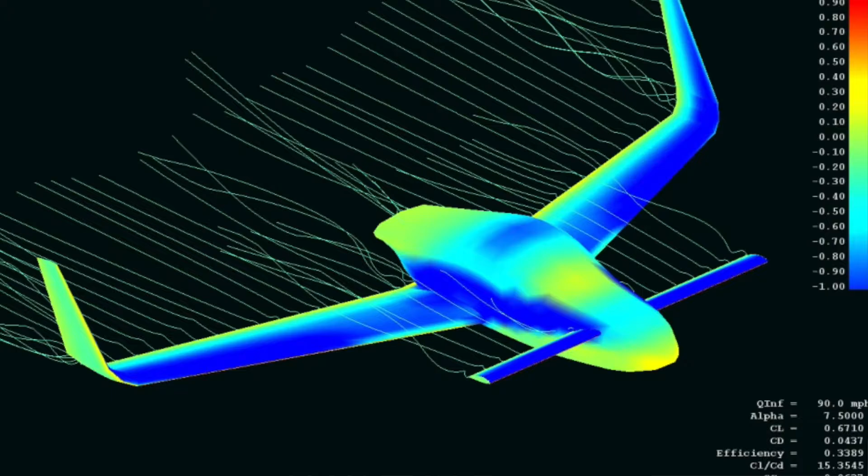We had to determine whether or not a program made by an MIT professor called X-Flyer 5 was a viable resource for the lab and for other technicians in the aerospace field to use to accurately characterize different airfoil characteristics that you would typically have to test in a wind tunnel.

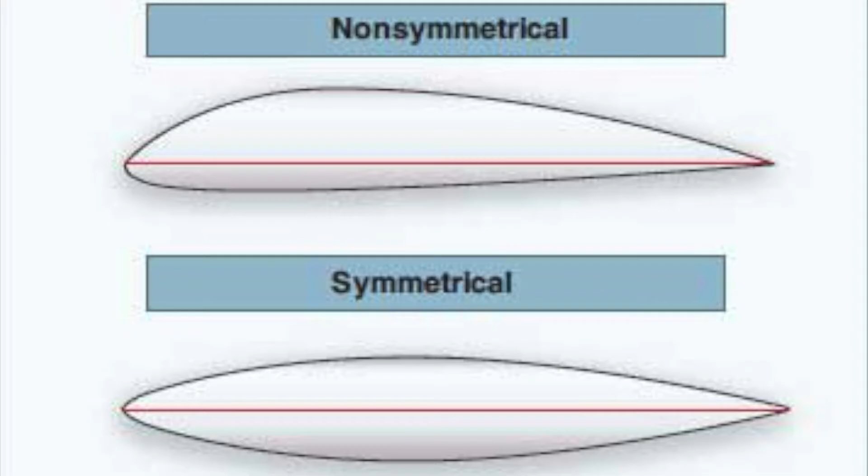So the airfoil that the professor chose was a NACA 0010 airfoil. It was a symmetrical airfoil, meaning the top and the bottom were exactly the same. The aerodynamic characteristics would be more consistent from top to bottom, whereas an asymmetrical one would either create more drag or lift within the airfoil.

A great example of this is a spoiler. If you notice, most spoilers aren't very symmetrical, and that's for a reason. They usually have some type of tail at the end to create more drag, because drag is needed for a lot of high horsepower applications, so you want the rear end planted down as you're delivering all the power through the drive shaft into the differential into the rear axle.

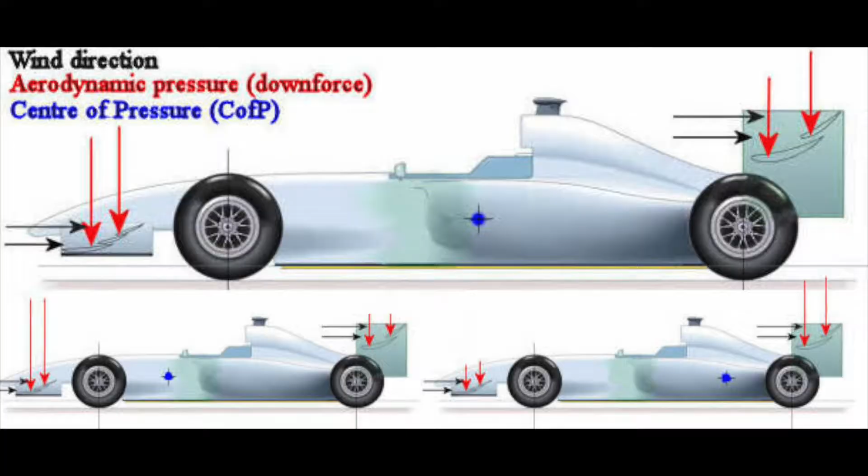So in this case, we wanted to test the NACA 0010, being a symmetrical airfoil, comparing results from actual wind tunnel testing to the program XFLR5.

The program XFLR5 is pretty cool. It has a directory of different airfoils, ranging from asymmetrical to symmetrical. Regardless, you're able to get your coefficient of drag to coefficient of lift charts, which is exactly what most engineers use to determine whether an airfoil could be used for their application.

Going into this, the professor asked us if we wanted to use Excel or MATLAB, because we were going to be going through a vast majority of different values from both the wind tunnel testing and the program. I've known Excel since I could remember, but I wanted to challenge myself, and I knew MATLAB was something I'd been wanting to learn since it's used tremendously in the engineering industry - automotive, aerospace, you name it. It's a great tool for data analysis and data manipulation.

I decided to do the same thing I did at UCLA with SolidWorks and do it with MATLAB. So if you can guess, in a week I read an entire Introduction to MATLAB book, which is right here - it's called MATLAB for Engineers. I did all the exercises, created my own programs, the programs that were in the book, until I felt comfortable with it.

So over the past century, applied aerodynamics has been used to characterize whether or not MAVs, or micro air vehicles, can be used in low Reynolds numbers, primarily Reynolds numbers lower than 200,000.

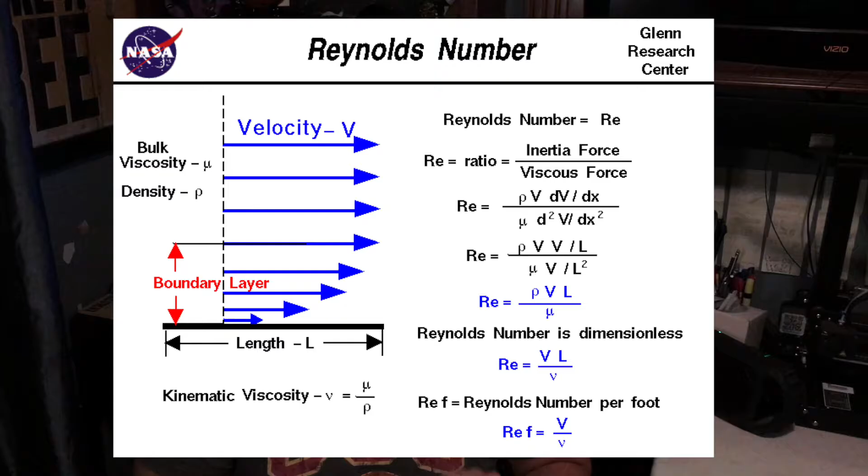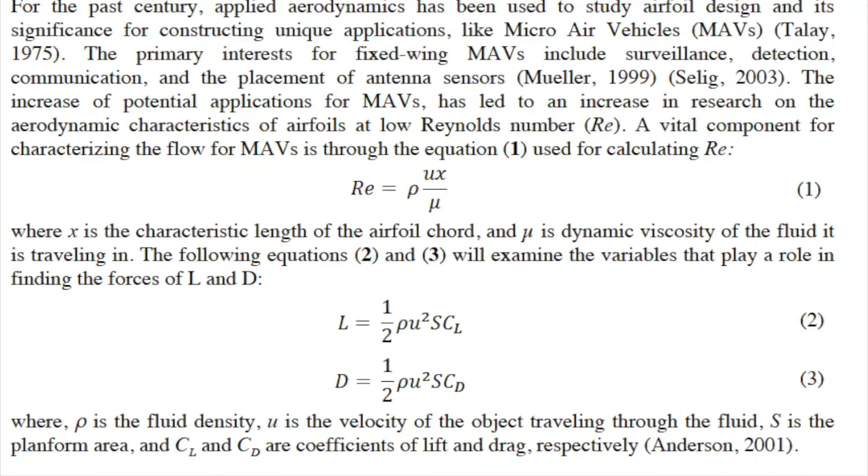Now, Reynolds number is just a ratio between inertial forces and viscous forces. A general equation for this would be Reynolds number equals rho times ux over mu, where x is the characteristic length of the airfoil chord, mu is the dynamic viscosity of the fluid it's traveling in, rho is the density of the fluid, and u is the velocity the vehicle is traveling at.

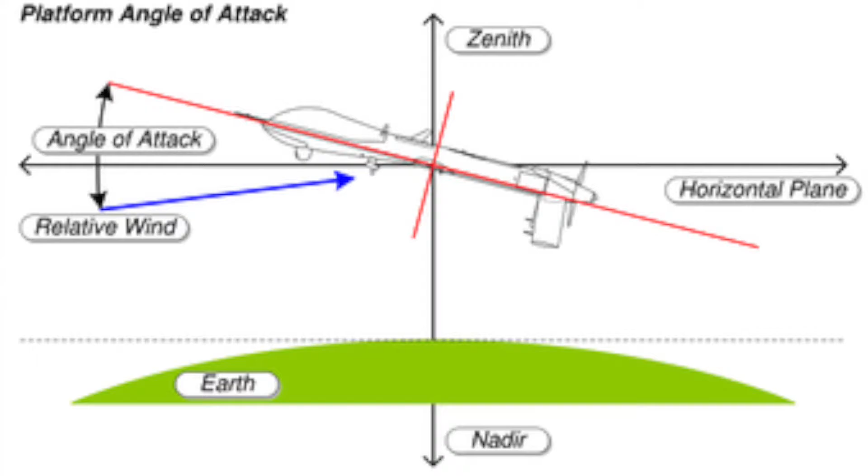From these Reynolds numbers, you're able to determine the lift and drag of an object. You put a to-scale model into a wind tunnel and measure its different aerodynamic characteristics depending on the angle of attack - the angle in which the vehicle is in relation to a horizontal surface.

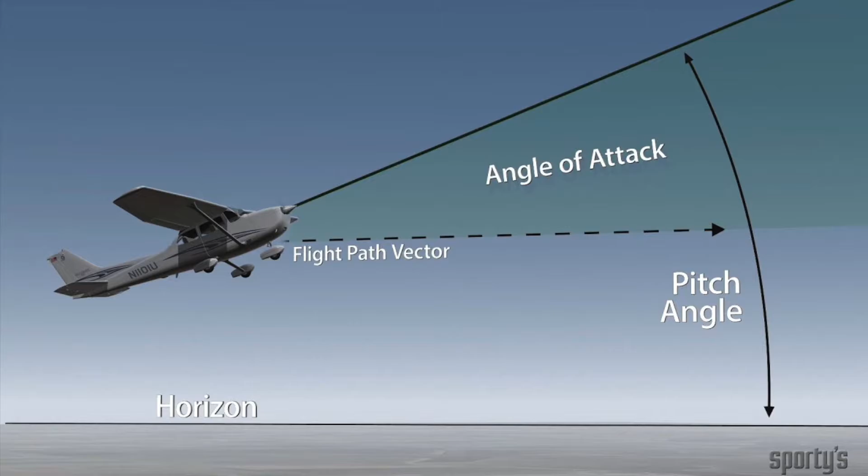If you've ever seen a plane take off from an airport, you notice it goes through the runway and immediately starts pointing its nose up, therefore creating an angle of attack. This angle of attack ends up creating a high pressure zone under the vehicle and a low pressure zone over the vehicle, creating the phenomenon of lift.

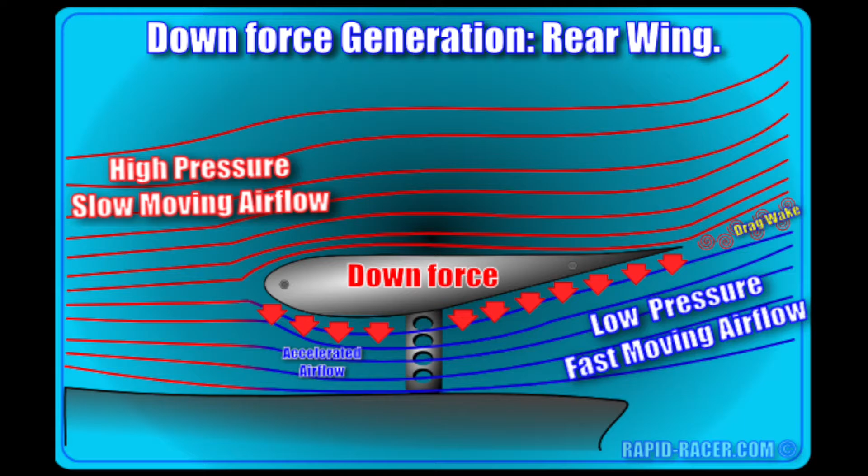And vice versa with cars, like I mentioned earlier with spoilers - if you have a higher pressure gradient on top versus the bottom, then you're going to create downforce, and that's what you want for your rear end to stay planted to the car.

Now, it's very important to keep angle of attack into consideration when creating vehicles, because each vehicle has what's called a stall angle.

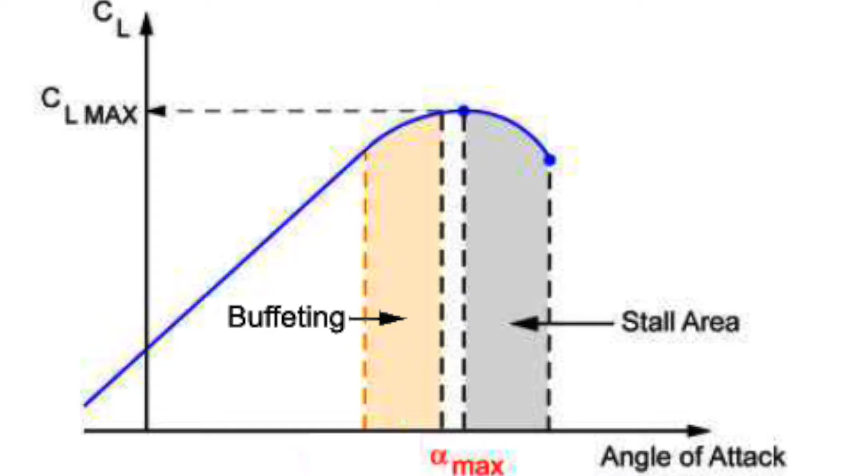If the vehicle reaches the stall angle, it loses all aerodynamic characteristics and is no longer able to be controlled. Over the past century, we have countless research papers and theories on what happens with Reynolds numbers that are high enough for larger vehicles.

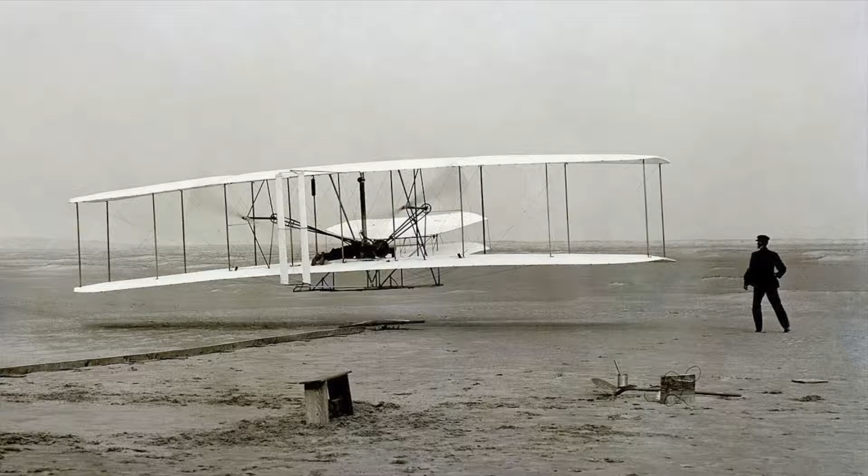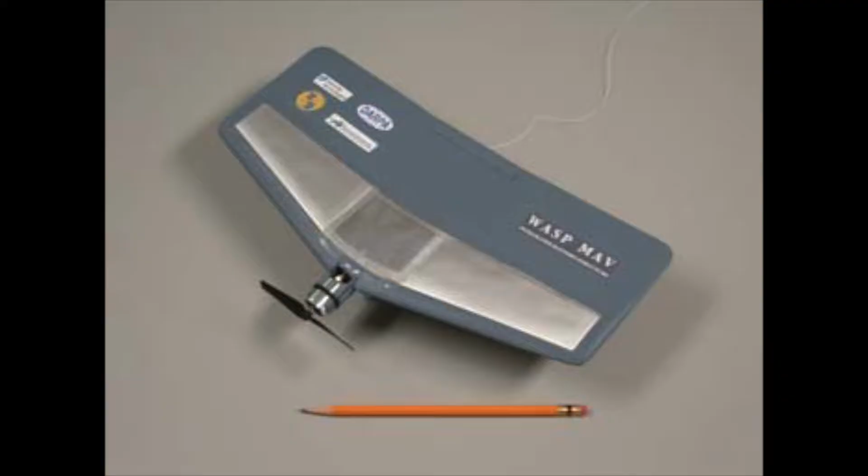When the Wright brothers began testing their vehicles, it was for a fairly large vehicle. Now in modern times, we're moving more towards drones and smaller vehicles, for their stealth, maneuverability, and compact sizing. Unfortunately, the research hasn't caught up, and for Reynolds numbers lower than 200,000, there's no real way of testing it theoretically without putting it inside a wind tunnel.

So our main objective was to see if XFLR5, the program I mentioned earlier, was able to accurately predict these aerodynamic characteristics for Reynolds numbers lower than 200,000.

Our approach was to have our NACA 0010 airfoil within the wind tunnel and change its angle of attack from -4 degrees upwards to 13 degrees, and also change the Reynolds number ranging from 40,000 up to 180,000. This was a good range - we could have gone lower, but we wanted to stay on the safe side to make sure we didn't get any turbulent flow.

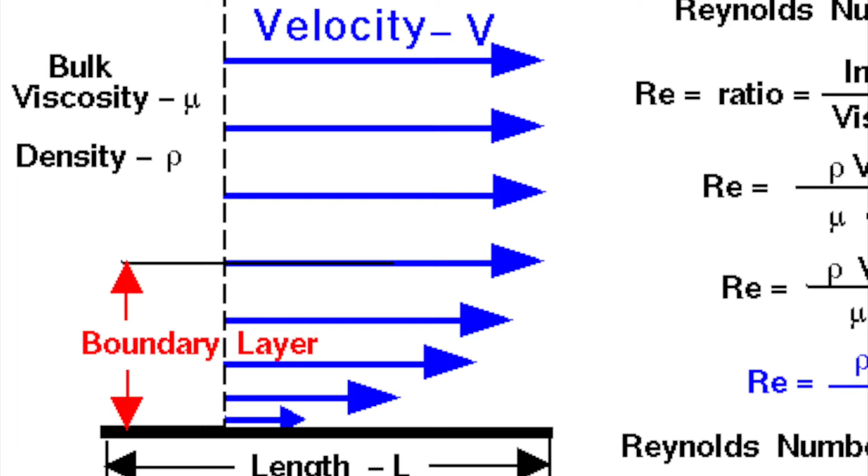Turbulent flow is the unsteady flow of a fluid. If you've ever seen a stream with very straight lines going through it, that means the flow is laminar. Now if you see the edges of the stream getting stuck to the walls, that's because the viscous forces are greater than the inertial forces. The inertial forces create the steady stream. As you get further away from the walls, the boundary layer is reduced and it becomes less turbulent.

You might have been on an airplane and heard the overhead announcement saying we're going to be reaching some turbulence, make sure to buckle up. Turbulent flow is fluid motion characterized by chaotic changes in pressure and flow velocity - it's all messed up, going all over the place, and unpredictable, with a lot of spontaneity. Laminar flow, on the other hand, follows a parallel line, is continuous, and has characteristics that can easily be recorded. We wanted to make sure we had that within the wind tunnel.

As we began our testing, we had to make a program using LabVIEW to record the values using the pitot tube. Within the wind tunnel, we had two pitot tubes - an upstream pitot tube and a downstream pitot tube. This allowed us to get an accurate, consistent reading of the velocity of the wind tunnel upstream before it hit any interruptions like the airfoil, and we also had one behind it.

The upstream pitot tube was stationary - it just gave us a basic value and made sure we had the correct wind velocity we wanted to test for the airfoil. The downstream pitot tube was the one actually sweeping through each layer behind the airfoil after it disrupted the flow of air.

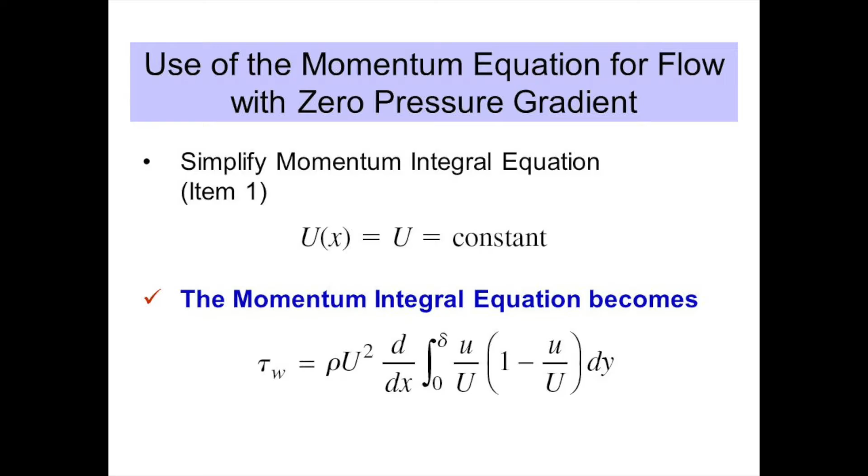When gathering all this information from LabVIEW, I had to change these Excel files and import them into MATLAB. Within MATLAB, I was able to manipulate the values to get the correct order of things I wanted - specifically, how the boundary layer was affecting the wake deficit of the airfoil.

I also wanted to see how the chart was starting to look with different angles of attack and different Reynolds numbers. From the beginning of the internship, we already ran XFLR5 and knew exactly what the program was spitting out, so we had an idea of what the chart was supposed to look like.

As I started putting the different coefficient of drag over coefficient of lift values versus angle of attack, I started to see the trend occur. However, the trend was either off because of our testing, or the XFLR5 program was off because of the way it was programmed. So after getting 1,000 lines of code done and manually adjusting all the boundary layer errors we found, we finally got a graph that looks something like this.

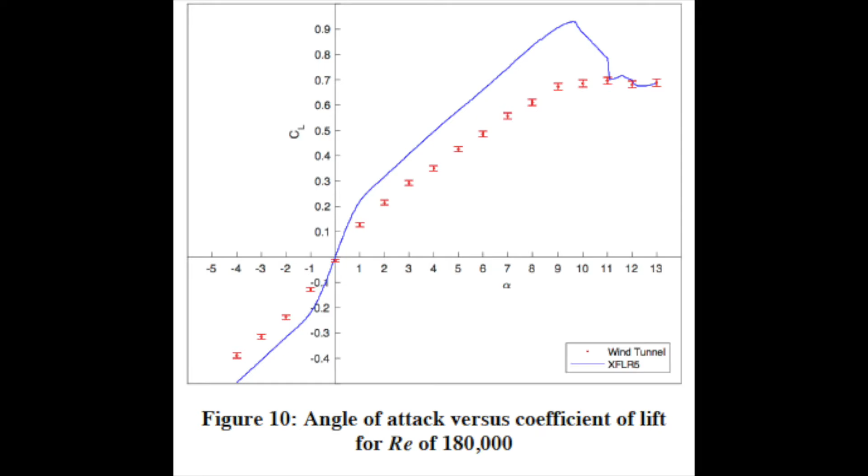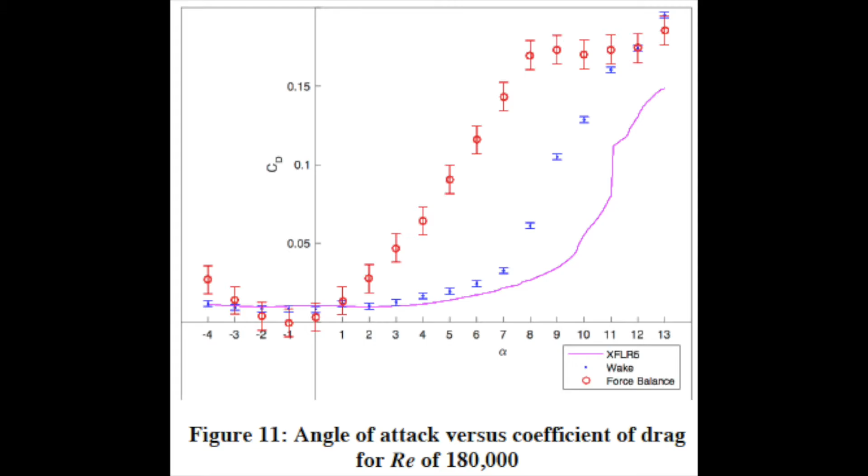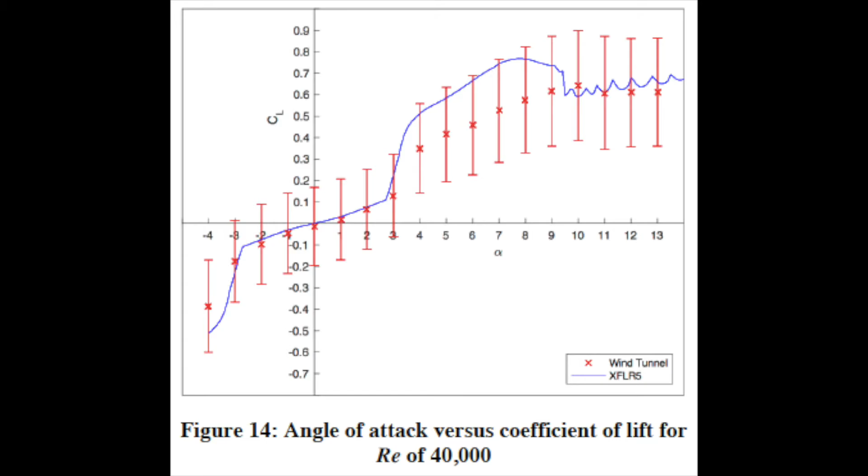We move over to 180,000 Reynolds number, and we see the characteristics also match. When we move to 40,000 Reynolds numbers, we also see the characteristics match, but we have these huge error bars. These error bars are here because of the amount of turbulence that we found within the system.

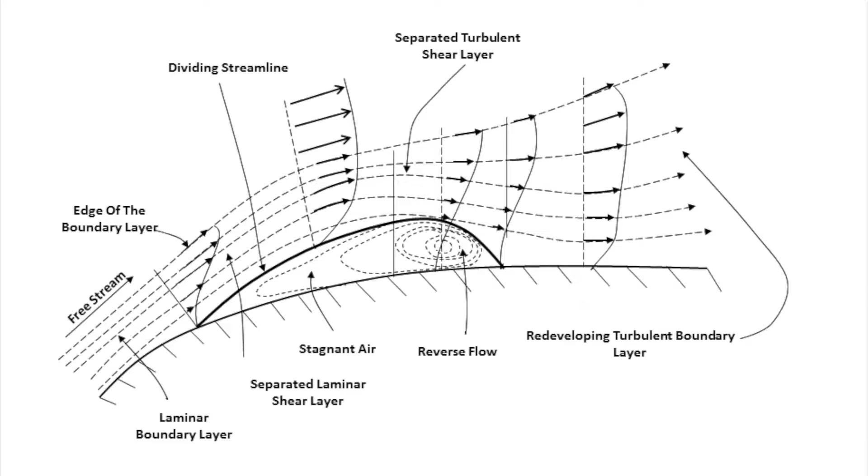Since we were dealing with laminar flow, we were noticing a phenomenon called laminar separation bubbles. As fluid is moving through the airfoil, it wants to stick, it wants to stay onto the airfoil. However, as you change the angle of attack, it gets harder and harder for the fluid to actually stick to the object. So what you end up getting is a bit of turbulence behind the airfoil as you increase the angle of attack, better known as vortices, and those vortices end up creating a bubble.

Since the flow is still laminar, there are some occasions where the flow actually reattaches to the airfoil and disrupts the force balance we had inside the wind tunnel. After realizing this phenomenon was occurring, a small correction factor was implemented into the code I had written, and just like that, we had correct values. The correction factor I used was 0.75.

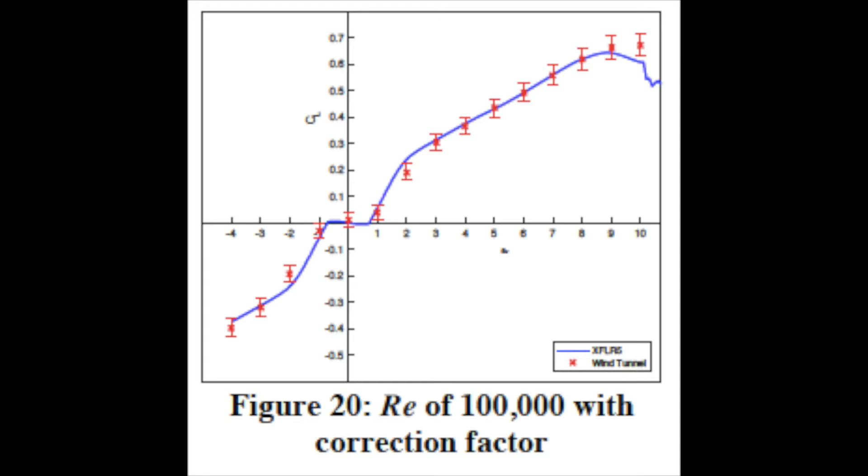By implementing this correction factor to all the data, this is what happened. We ended up getting accurate values. If you look at these charts from before and after the correction factor, the results are incredible. As you can see, as we match up the coefficient of lift versus angle of attack, the values on the graph are very similar. We did involve a couple errors that might be coming from the tolerance of the force balance, from the pitot tube, and also the compressibility of the air.

So why is this important? It's important because engineers in the aerospace industry can now use this program when developing micro air vehicles. This is very important, especially for companies like Amazon that are trying to implement one-day shipping by drones. You have to have these drones able to withstand the realistic aerodynamic characteristics involved in creating a smaller, more compact vehicle. This can also carry over to smaller surveillance drones, to military applications, you name it.

Now you eliminate the need to have a wind tunnel because you could use this program that was developed for that very purpose, which is to expedite the process of predicting these aerodynamic characteristics with whichever airfoil you need. Granted, we did only use this program for the NACA 0010 airfoil, which is a symmetrical airfoil. Therefore, there's a lot more testing that can be done for non-symmetrical airfoils that could also help in the industry.

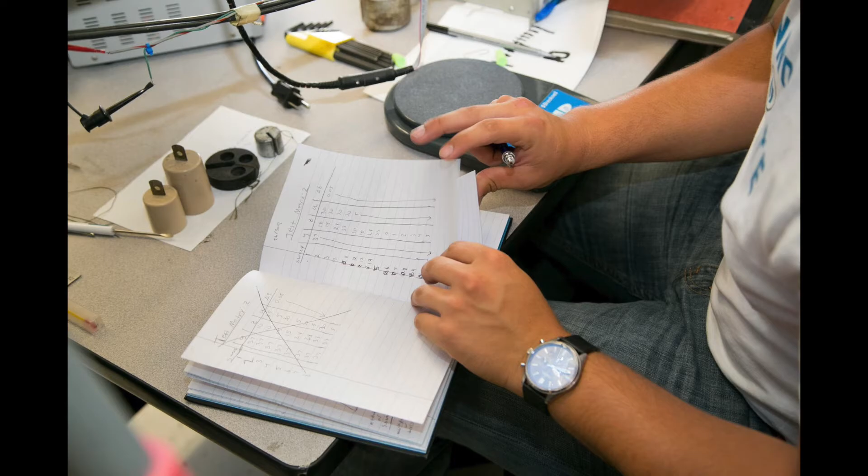The process was incredible. I was able to work in a lab and actually control a wind tunnel. I was able to understand physically and theoretically how fluid mechanics works. There's one thing to actually learn in a book what a wake deficit is or a laminar separation bubble is, but until you physically see it within data, you really understand what the book is talking about.

This was worthwhile because, like I said, I was able to work with LabVIEW, improve my skills in MATLAB and data manipulation. It made me that much more passionate about the aerospace industry, especially when you're in a lab that's doing PIV.

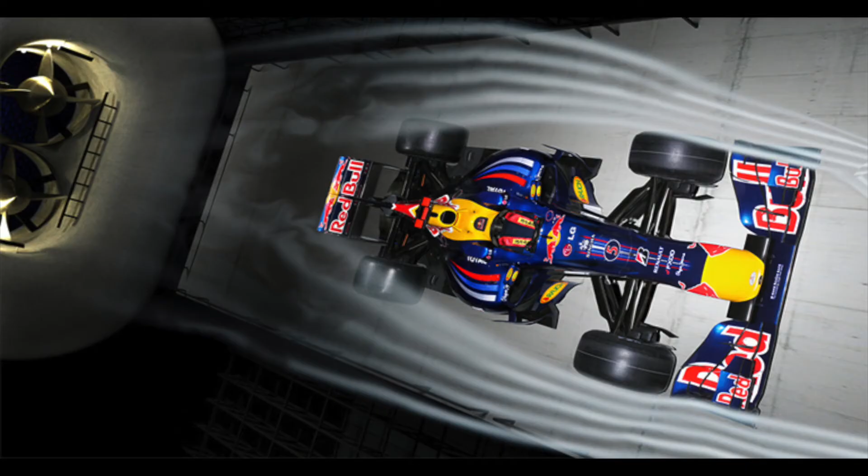PIV stands for particle image velocimetry. You might see this in automotive commercials where they put smoke around a car and notice the streamline and see how smooth it is. At this point you get a better picture of what they mean by coefficient of drag. In reality, it's just another way of flow visualization, but here you're able to see it in real time. It's another way to document exactly the same thing we're doing, which is getting aerodynamic characteristics.

That's what the graduate students were using. They were using PIV for all their testing, all their thesis and dissertation information was coming from PIV testing. Being able to see that firsthand and actually set up a couple jigs for them was incredible, because not a lot of people have that opportunity. This is a multi-million-dollar system, and they let a community college student help them in their testing. It makes me feel so grateful to have this opportunity that Base 11 gave me to aid in the aerospace industry.

The experience wasn't as influential as UCLA as far as building the community that a lot of community college students are robbed of. However, it did teach me a sense of independence, not only in my personal life, but in my academic and professional life as well.

I had to really just sack up and say either I'm gonna learn this or I'm not gonna learn this. There's been many times where I just beat my head and can't learn something, but I have to persevere. I really urge you guys to also persevere, because this internship was not easy. It was probably the hardest thing I've ever done, given the fact that I was a community college student who had to learn all of fluid dynamics in a summer, in addition to MATLAB.

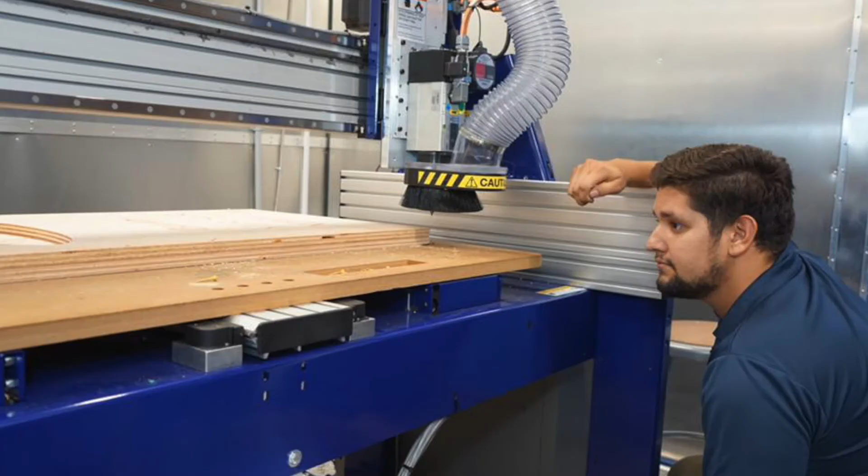I had to wait so long for my time to come, but when the opportunity presented itself, I made sure it wasn't gonna slip away. That's the most important thing you have to get from this. Whatever opportunity is given to you, make sure you grab it and chokehold it and never let go of it, because it could be gone like this.